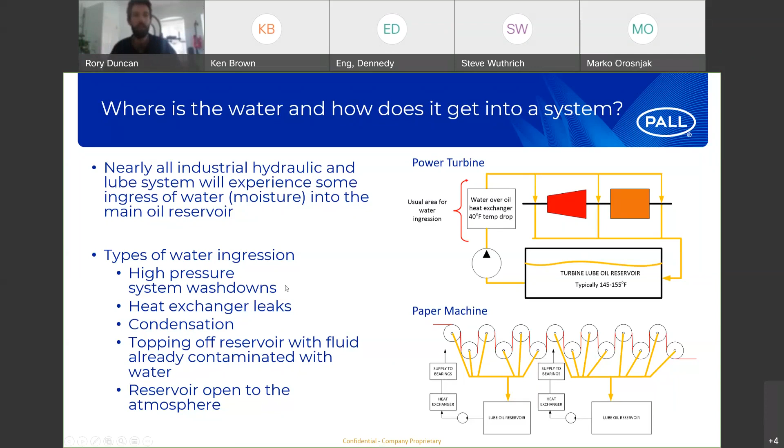So just jumping in a little bit more detail, and the reason why you do have to start talking about oil dehydrators is because there is just so many points of ingress of water. Very similar to particulate contamination, but it generally is a little more underscored. It happens a little more in the background that people don't really sort of understand or are acknowledged to.

So one of the big ones that you get is condensation from humid air. So if you have an open top reservoir, or you have just a reservoir with a gooseneck air inlet for it, so a gooseneck breather, then what could happen is if you have a very humid environment around your reservoir, which is pretty par for the course for many of our steel mills or many of the pulp and paper plants, they're very humid environments, generally a pretty hot area, you can actually get a lot of that air with a lot of water vapor in it getting sucked into the reservoir. That will then just cause that water essentially to sit in the reservoir. It can condense overnight once the machinery is being turned off, and then it can fall into the oil pretty quickly.

Other areas are things like makeup oil, where you've had a canister just sitting around, and then it's been able to breathe that open humid air in itself, and you go and top up your reservoir with that oil that's now contaminated with water. And even if you've got really good housekeeping practices and you avoid all of these situations, it's still difficult to avoid some of the things like cylinder rods. Maybe the seal on the cylinder rod is slightly failing, and so there's little bits of water that are coming in every time that cylinder rod moves backwards and forwards, or some of the valving might be collecting water at certain points. So there's multiple different areas where you'll get water ingression with inside of a system.

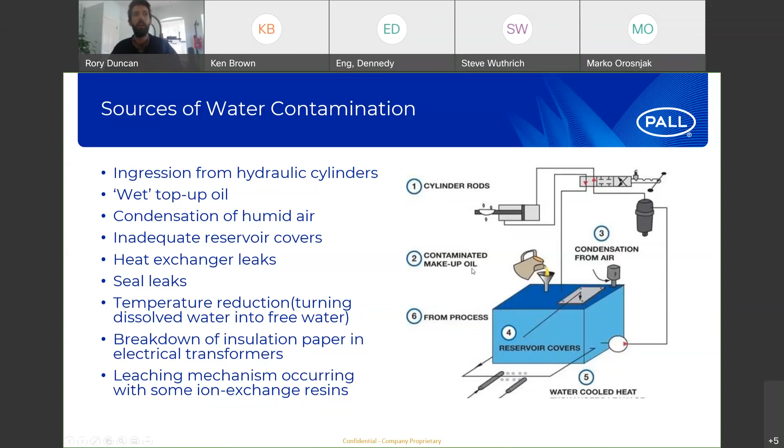So looking at a paper machine, so just a really pragmatic example of why it can be difficult to completely avoid the ingression of water. So if we look at a paper machine, it has a number of these steam drums on them. These steam drums have the paper residing on the outside of it, and they're supported by two large bearings on either end of the drum.

This drum has steam injected into the middle of it to heat it up. If there is a small failure of the seal on any one of these drums—and these can have up to 50 drums in a large paper machine—you can get leakage going over into your bearings' main lube. Because all these bearings are connected to a central lube system, that will affect your entire lubricant system, affecting all the bearings together. So one point of failure on the steam side can cause multiple points of failure for the bearing lube oil.

It's very difficult to root cause this, and it can happen fairly spontaneously at these sites on these applications. It's difficult to stop it from happening altogether. So having a good way of monitoring when it happens, and a good system in place to effectively fix the problem once it's happened, is really a good situation to be in, because it's difficult to completely avoid this instance. It's just one example of where it's difficult to completely take out the problem of water getting into your oil system.

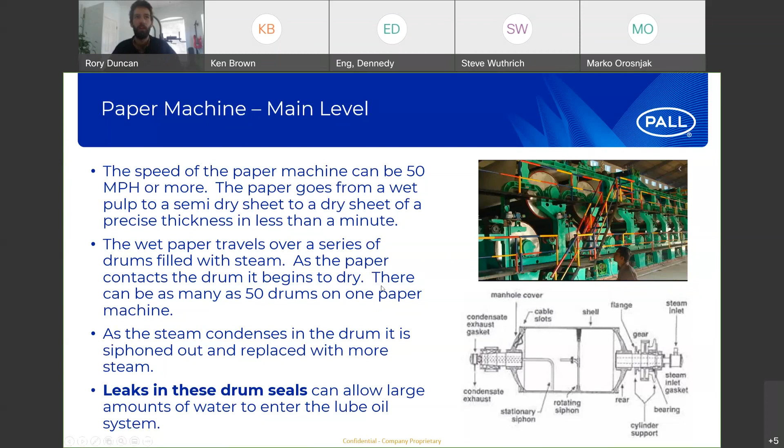So water contamination in oil, why is this a problem? What does it do, how does it affect you in a detrimental way, and how does it cost you money for your facilities?

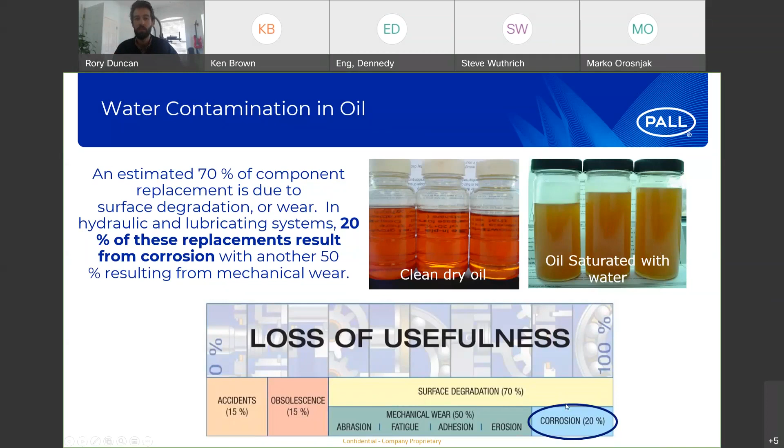Now, not only do you have a water problem, you've got a filtration particulate problem, and that might also generate into a further issue with your equipment needing more power to run because it's got more friction in the system, or you need essentially failure of that piece of equipment and need to replace it. So it can cause some really big downstream effects if you let it get this bad.

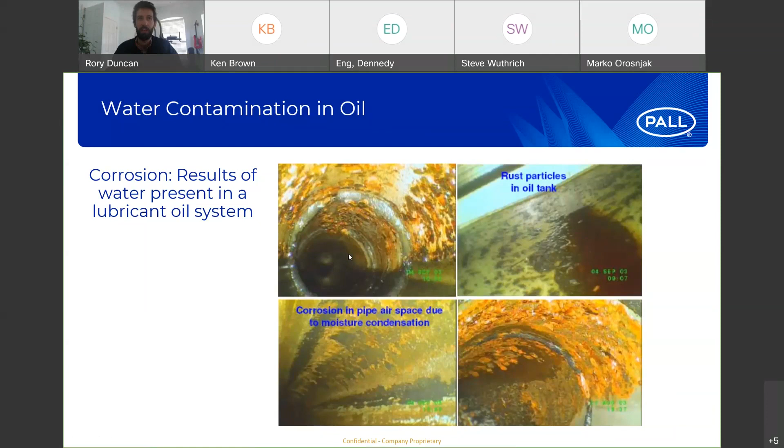So if we also think about the detrimental effects of water, you can think of it in two different ways. One of them is that corrosion way we discussed, but there is a second area which is just as important. It doesn't quite affect the usefulness of equipment, but in the way that original study was looking at it, it more affects how the overall system is doing its job, and how you're producing paper or steel, or how your mining equipment is performing overall.

What essentially the second study that Pall performed was looking at these high molecular weight compounds. What was generating varnish and sludge within inside of these systems?

I'm glad that Ken actually mentioned that the next session is one on varnish, because varnish is not a very well known property or contaminant within many of these oil systems, but it can have some massive detrimental effects on your overall equipment. Do actually go listen to that next session, because you'll learn a lot about how varnish can essentially take out your filtration system and then destroy your piece of equipment right after, very, very quickly. The precursors that generate it happen very fast. You can go from having a pretty clean system to having a very highly contaminated varnish system very quickly. So it's something you really want to watch out for, and it's difficult to monitor in terms of taking samples - you have to actually ask them to look for some of the precursors.

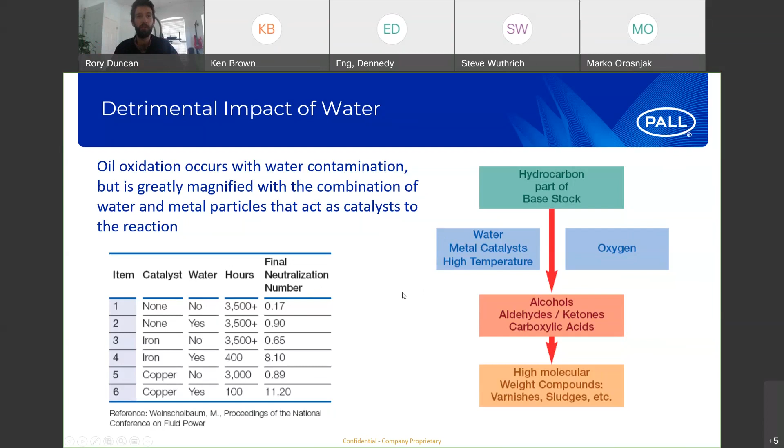One of the other things I should mention is that the things that are in the water - normally when water gets mixed in with your lube system, it's not reverse osmosis pure water. It's normally just water from the air or from a tap source. And so it has particulates and probably some ions in it, and those will react or have the propensity to react with potentially some of the additive packages or with the oil itself.

And so by ingressing some of this contaminated water, you could precipitate out some of your additive packages because it will react, causing it to essentially just drop out. Now you've lost your additive package for your oil. So whatever that was put into the oil to do, it might not be able to perform at the specification that the supplier of that additive package wanted it to perform at.

This is really an ancillary area, but it's also of importance because people are looking at their oil and thinking, why am I getting foaming? Why is this foaming problem happening? And they don't think, oh, maybe the water that's been ingested into my reservoir has caused a reaction with my anti-foaming agent, dropping it out of the oil solution, and therefore I've got no anti-foam in my oil anymore, and that's causing a massive foaming issue for me. So there's a couple of these instances that do occur inside oil systems.

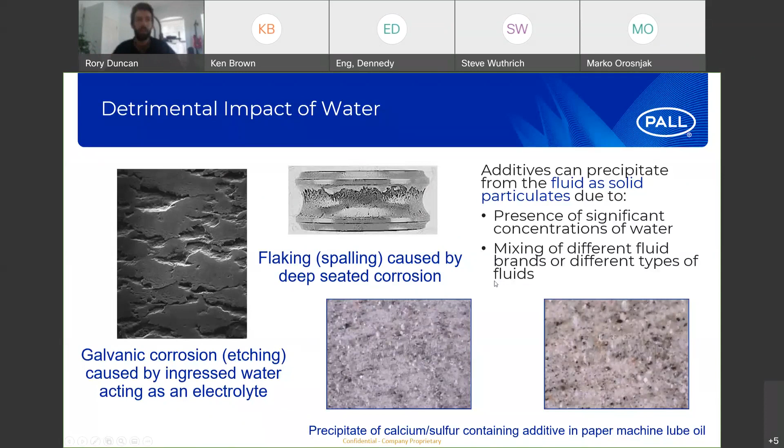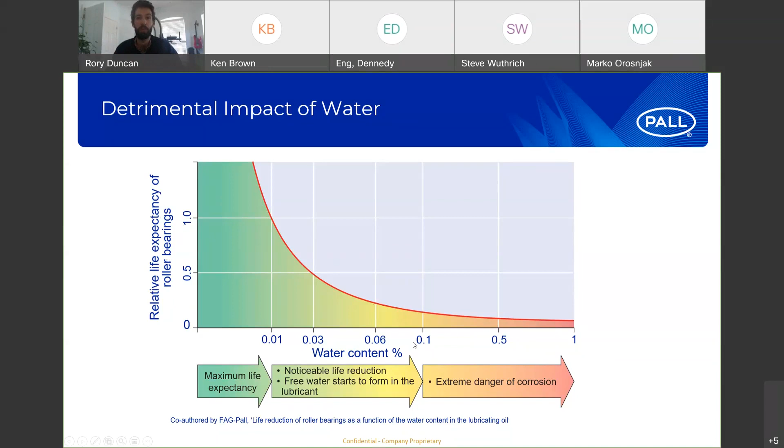So we've seen this in a number of different pieces of equipment: as you increase that water content, you start to get dangerous corrosion, you start to increase the oxidization of your lubricant hydraulic systems, and that will then reduce the performance of those lubricant hydraulic oils, and therefore you'll start to get this loss of life of the equipment pretty quickly. So it is a fairly dramatic drop that you start to see as water content starts to build up. It does have a fairly big effect overall.

So just to summarize again, fluid breakdown - what does water do inside of oil systems? Number one, fluid breakdown, so additive precipitation and oxidization, that's a big problem because it means your oil isn't performing how you wanted it to perform. Reduced lubricating thickness, because water has a much lower hydrodynamic film thickness, and once it starts mixing with that oil, now you reduce your film thickness overall, and then you start to get some contact between those two mating surfaces.

That'll then generate particulate wear, greater amounts of particulate wear, and then you've got a filtration problem to deal with. Accelerated metal surface fatigue, as I mentioned, you've got some of this corrosion aspects.

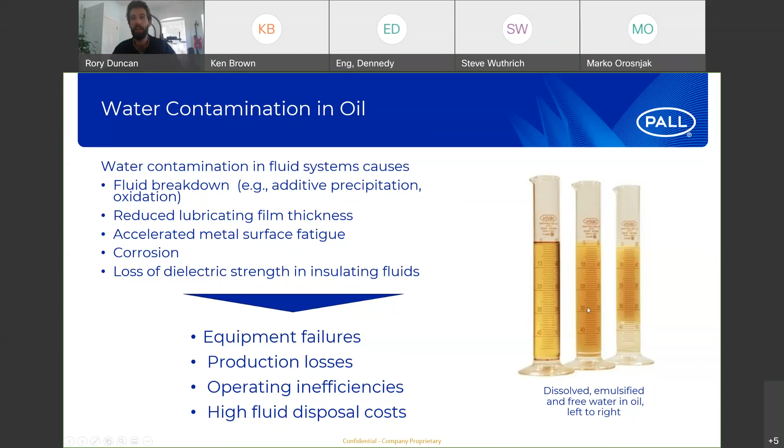The middle one has emulsified water in it. And the right one has a split between free water. So you can see the free water build up at the bottom. You can see some emulsified water at the top. So it actually has free water present. So we're going to go into what that is and how we can address those three different types of water being present in our oil reservoirs.

So just from the outset, free water is really the most damaging piece of all of this. Free water creates a number of additional problems, such as the generation of bacteria inside of your oil systems. At the surface between the water layer and the oil layer, if you get a microbe into your system, it can actually live in between the interface there and start to generate and grow into this very sludgy type of tar material, which can do essentially very similar effects to what varnish does to your system.

And so you really want to avoid free water at all costs. So everything should be put into completely avoiding free water. The good thing is housekeeping addresses free water very, very well. So if you have good housekeeping practices, you maintain closed reservoirs, you have desiccant breathers on your reservoirs to avoid any humid air getting into them. You make sure you top up with clean oil, clean new oil. Then you should be able to address a large proportion of free water within inside of your system.

Of course, there's always mistakes that happen, and so you may still see free water, but overall, that's what you want to address primarily. Once we start talking about the saturation point of water in oil, and we start looking at the dissolved area, this is where you start getting all those problems that we've previously just mentioned. So the dissolved water has some very detrimental effects that we've mentioned previously.

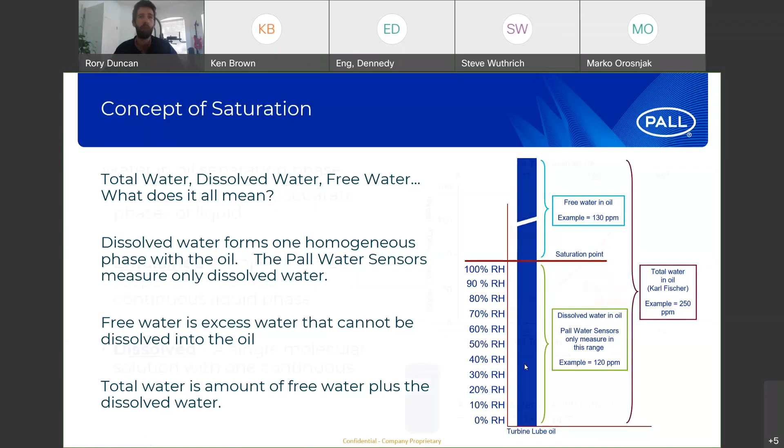This information will tell you that if you're running your equipment at 50 degrees C or 122 Fahrenheit, the saturation point, where you'll start to go from having dissolved water to free water, that line at 100% saturation will occur at about 110 ppm for this specific example. So your saturation point will be 110 ppm of water, and anything above that is going to be free water existing in your system. You want to make sure that you're at least below 110 ppm at 50 degrees C.

So that's really the critical piece here. You can probably see it from the slide: as you start to decrease temperature, that saturation point goes down, and as you increase temperature, that saturation point will increase to higher and higher amounts. The oil will essentially be able to dissolve more water at higher temperatures, and less will be able to dissolve at lower temperatures.

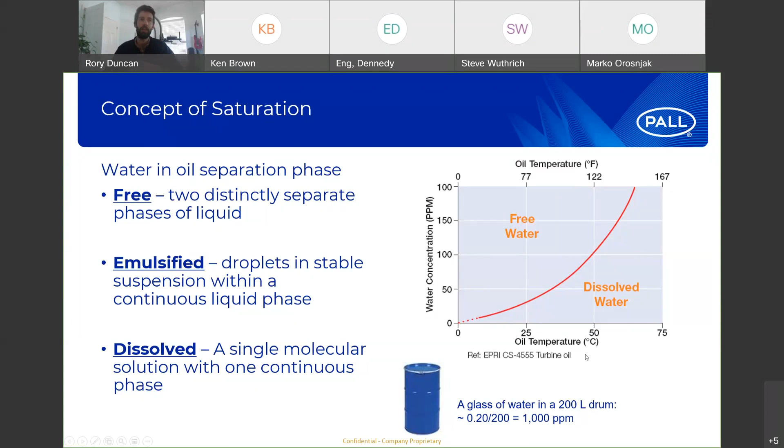So how do we actually measure this? There are many different ways of measuring water. Looking at some of the easier ones, the crackle test is a very old school method of measuring water in oil. It's not quantitative, so it's a qualitative solution for measuring it. Essentially, you're getting a sample inside some kind of metal cylinder, heating that sample up, and seeing if the water starts to crackle or evaporate off from the oil sample, similar to deep frying. So not a great method for an industrial solution.

Chemical methods: you can put additives into a sample. Those additives will mix with the sample, and you can do things like titrations, or precipitates, and measure the precipitate to tell you how much water is in there. Again, it's not very accurate. It takes time as well, and there are a number of different reagents that you need to continually purchase in order to do this effectively. So it's a good method for a laboratory scale, not really for an industrial scale.

The rest can be much more effective for larger industrial scales. Distillation has limited accuracy, and it may also not be the best method for determining where the water is coming from. FTIR, Fourier transform, requires buying very expensive pieces of equipment, so you might not have that readily available and have to send it out to a lab anyway. So this might not be the best way, and it's not as accurate for low water concentrations - it's really accurate for higher levels of water concentration.

So these are just two examples of some capacitive sensors that you will see on the market: the WS12 and WS18. These two units can measure in ppm and percent saturation, and you can put them directly in line. They can also do some tracking, monitoring and trending with some other devices that can be attached to them.

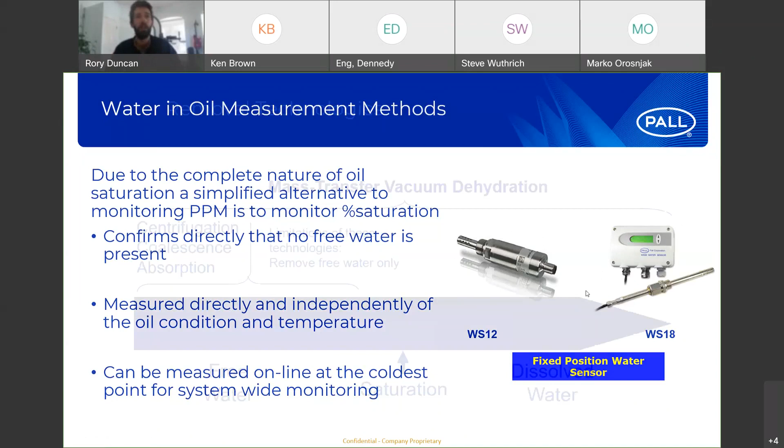So once you've measured that you have water in your system, what do you do about it? At the beginning, if you've just got free water, we can use things like coalescers, absorption filters, or centrifuges. But generally, once you take out all the free water, you start moving into more and more difficult areas, and it becomes harder and harder to remove that water. So the number of technologies available to you starts to limit down pretty quickly.

A centrifuge is a good piece of equipment. It takes out a lot of the water very quickly, but again it only really addresses that free water level. You can, of course, do things like put a heat exchanger before your centrifuge, dropping that temperature down, which drops you down further in the saturation curve, and therefore you can take out more water. But you're just increasing the number of pieces of equipment, and it could be fairly complex.

There can be some other problems overall with using centrifuges. They are a moving, rotating piece of equipment, so they have their own maintenance problems involved with it. Overall, they're very good at actually removing free water, and they do a very fast job at it, but they are unable to address dissolved water, and they might not be the most economical solution overall.

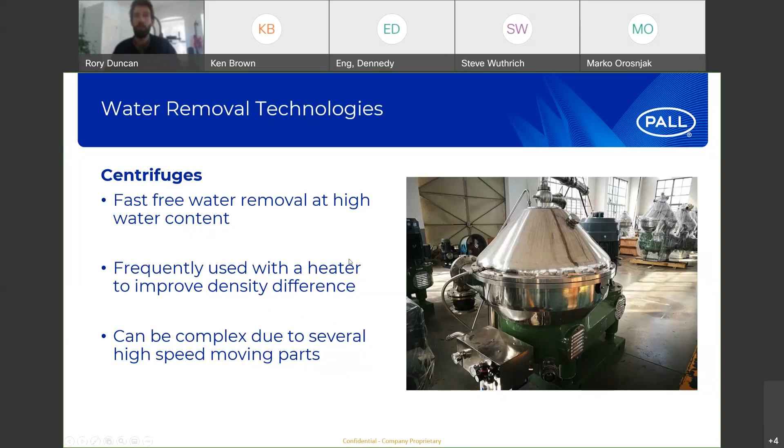Coalescers are similar to a filter element. Essentially you're grouping together small water droplets into larger water droplets and then separating them out from solution. It's a fully mechanical process, kind of like squeezing water droplets together. And that squeezing action means that it's only affecting free water. It does go into the emulsified water area a bit, but you're generally not touching any of the dissolved water at all with a coalescer.

You can also get problems with disarming, where if you have surfactants, which are pretty common inside lubricant and hydraulic systems, those surfactants will blind off coalescers fairly quickly, essentially making them useless and reducing their lifetime from years down into weeks in some instances. So there are some major problems with coalescers being used for hydraulic and lubricant oils to remove free water, and again, they do not address any of that dissolved water area.

Absorbent materials can get a little bit into the dissolved water, but not very much. Again, it's really focused on free and emulsified water. There can be some big problems though, because once the media reaches its capacity of water, it can actually start to break down due to the pressure. There's a large pressure differential between upstream and downstream of these absorbent medias, and you can start to get unloading of water, not just in small droplets, but in large slugs that go downstream. We generally at Pall advise not to use absorbent medias for that reason, because they can cause much larger problems.

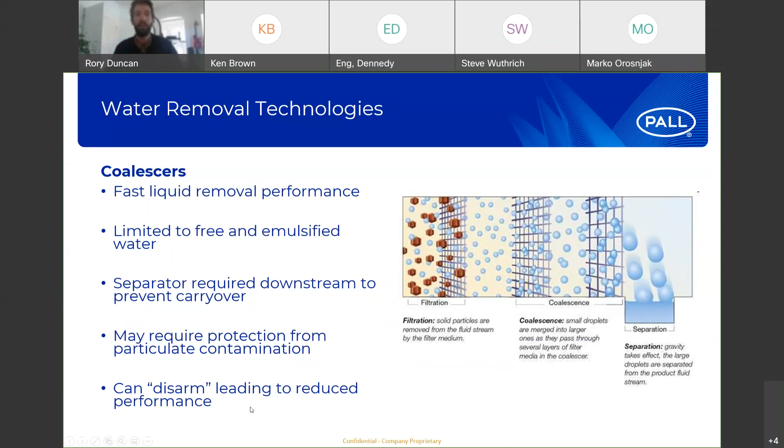That's a good question though. We have, if you're interested, do reach out to me, a whole technical presentation on coalescence. It's very useful for separating out free water, so if you really want to address free water quickly, coalescers are quite a good technology. Not that great for hydraulic and lubricant systems though, for some of the reasons I mentioned. They're not the right technology generally.

So removing free water might not be enough. I've explained this a little bit in a previous slide, but imagine you're at the high temperature point, and you remove all of your free water using a centrifuge. A centrifuge is a really good piece of equipment at removing free water. It removes all of the free water from the system, and now you're at this second point, right on the saturation curve. Then your oil goes through just a pipe that isn't insulated.

You're in Canada, and it's negative 20 degrees outside, and the temperature dips down a little bit. I'm just making up a situation here, but if your temperature dips down, you could actually move into an area where now you have free water, because your temperature has reduced but the amount of water content in your system hasn't. So you can go from this second point to this point number 5, and now you've got all this free water in your system. That free water can remain until it gets redissolved back into the oil, but as it's going along as free water, it can cause all those damaging effects.

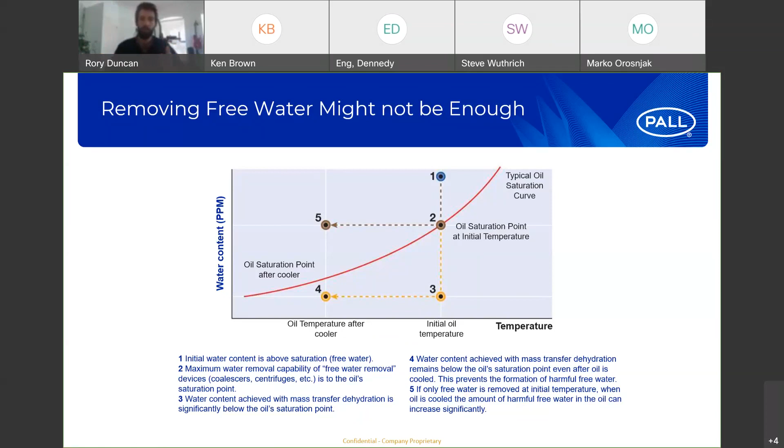So potentially just removing all of the free water will generally not be enough. You want to get down to the point at which you're under your saturation curve for the largest temperature range you're dealing with at your site. So don't just cool it down, don't just remove the water you think you have at one point. Try to look at your entire temperature range. Economically you can't get down to really low temperatures, but look at the widest temperature range you have and try to get below the saturation curve at your coolest point. It's really important to look at your coolest point.

So the last piece of technology we're going to cover is vacuum dehydration, the big piece of equipment used to remove a lot of the dissolved water. If you have dissolved water in the system, vacuum dehydration technology is the premier, number one technology for essentially removing all of that dissolved water. There are many different ways of doing this, and the one you see here is nozzle technology. Contaminated oil with water comes in through the inlet on the left-hand side, moves through a filter to make sure you don't get particulate inside the dehydration chamber, and then the oil fans out from the nozzle into a very large, high surface area, thin film fan spraying down into the collection zone at the bottom of the vacuum chamber.

The reason you want a large surface area is that the more surface area there is, the more water that can be driven off. It's a key feature of many dehydrators, how much surface area they can produce, so it's an important piece that a lot of manufacturers try to promote. With nozzle technology, you're pretty limited with the surface area you can produce.

There's another technology, which I'll show you on a further slide, that uses a number of randomly located rings, and the oil gets dripped over those rings, creating a much larger surface. So you can get a lot more water removed because there's more surface area of oil to remove that water from.

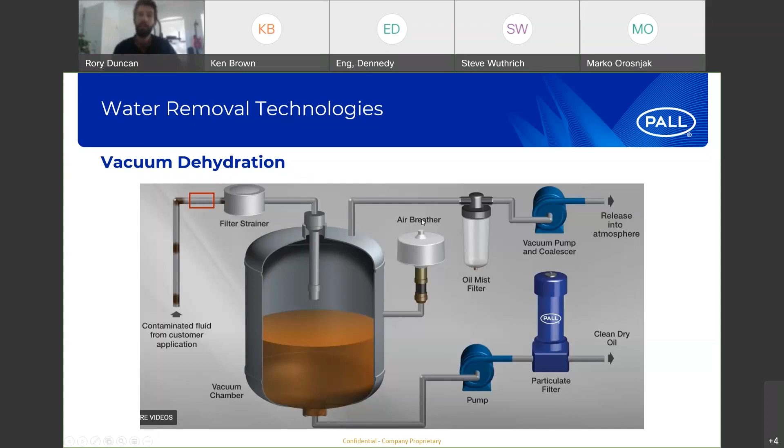One of the last technologies we'll cover here is a dehydrator that uses those randomly located rings, all interlocked with one another. This is the system that Pall promotes. It removes 100% of free water and gas at the same time, so it's got some gas removal properties as well, and up to 80% of dissolved water and gases within a system. It's similar technology to the one we showed on the last slide, but uses a different way of building up surface area.

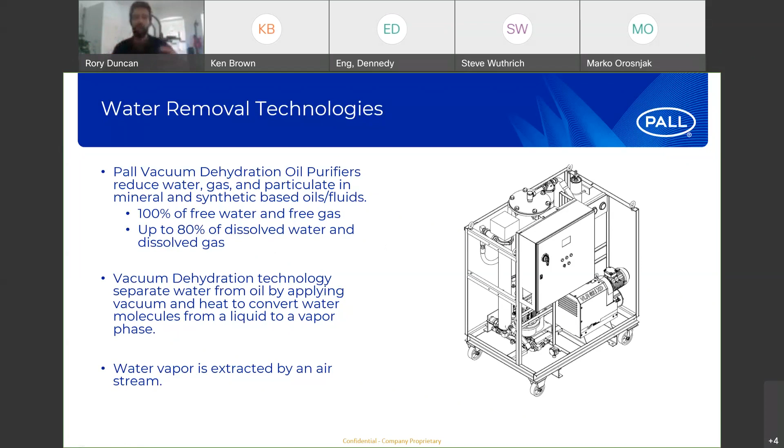So how do you select the correct technology? I've kind of cut to the chase as we moved through it, but if you're dealing with free water, you can use things like absorbent elements, coalescers, and centrifuges. Centrifuges are a really good technology for free water, but generally that isn't the only thing you need to remove.

Really, the main technology we try to steer people towards is vacuum dehydration, because it's very effective from a cost aspect. You have one unit all by itself with very low maintenance, and it can address all of your water concerns in one go. You don't have to use multiple technologies or any kind of heating or cooling systems with it, and it can address both free and dissolved water.

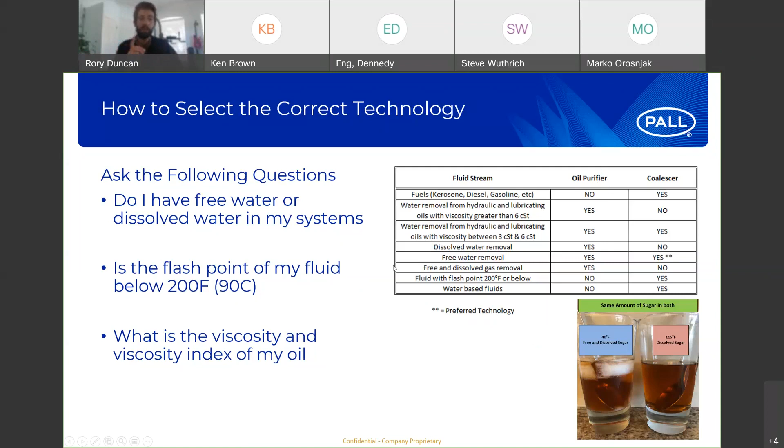One additional piece of information to note before we stop is there's a new standard out there. It was made in 2017, but it's only recently been introduced for broader adoption across markets, the Dehydration Performance Standard. So if you want to write it down: ISO 18237:2017. What a lot of manufacturers had a problem with was measuring their own performance, because they had internal tests.

Pall had an internal test for our unit, and many of our competitors had their own tests, and none of the tests matched up. They were all measuring different ways of claiming performance. So when a customer came to us and said, well, this unit has this performance, and we'd say we have this performance, it was very hard to match those two together. That's why this standard was essentially invented, to try to match all of the performances across all the different manufacturers of oil dehydration units.

If you want to download the standard, it's about a 12-page document. We also have a white paper that breaks down the standard. If you're interested, just reach out to me and I can send you a short 1.5-page white paper about the standard and what it can actually do for you. Overall, it'll tell you how fast you can remove your free and dissolved water from your system.

It's a 3-part code. The first part looks at the free water, and the next 2 parts look at how fast you can get from a high amount of dissolved water to a very, very low amount. So it's essentially how many passes you need through your dehydrator in order to get out a certain amount of water.

Last piece, case study. I won't dwell on it since we're already a bit over time, and I want to open it up for questions. But essentially Pall went out to a customer in Iowa, and we were able to achieve a 15% energy reduction on their system through the installation of three oil dehydrators. These three oil dehydrators solved a number of the problems mentioned previously in the presentation, giving them a large boost in energy output, which helped reduce their energy costs.

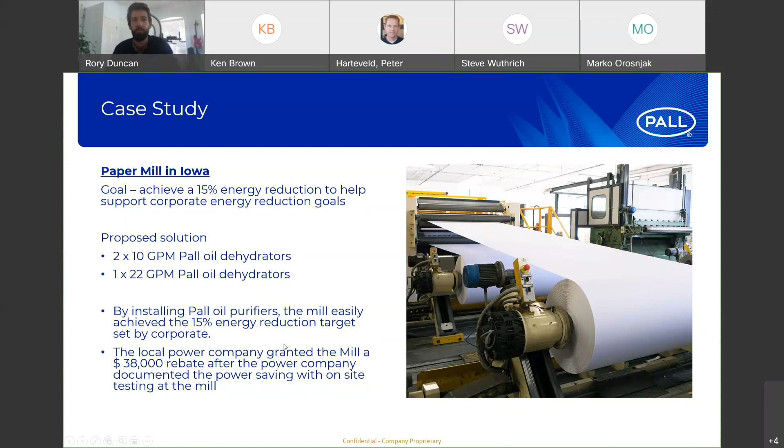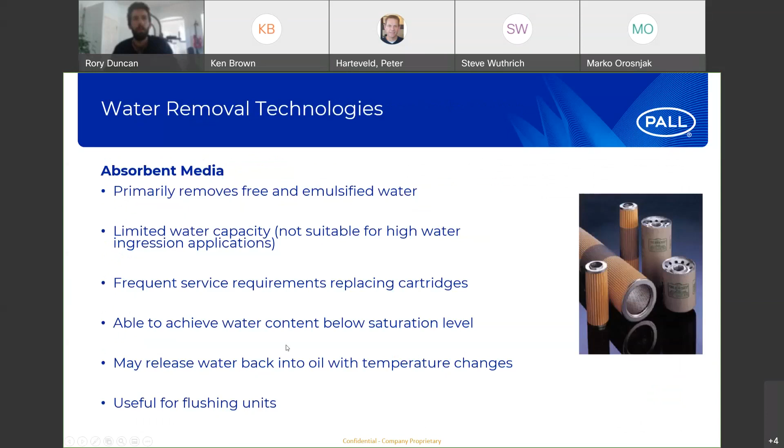So the FTIR method is not accurate for low water concentrations. When we start to look at lower ppm amounts, FTIR starts to get too much interference from other frequencies when looking at the frequency response plot. Because of that, it's harder to determine if it's water, or an acid chain, or potentially an alcohol or ketone being produced in there, which have similar, not exactly the same, molecular weights - they're much heavier, but they can pop up in similar kinds of peaks. So it's harder to determine when you have a small concentration.